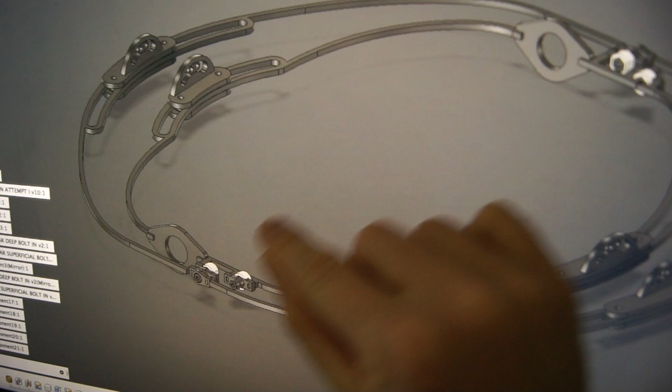And then it'll be kind of stacked up, and what'll happen is these are all spinning around one point. There's a point in here where your spine would be. So it's spinning, the sagittal joint is spinning through that, and then it comes around. And then sliding on this is the transverse joint, which is also going around that same point. And then these are the frontal joints, and those go around the same point as well. So they're all on this plane, and it's all on one point right here in the middle.

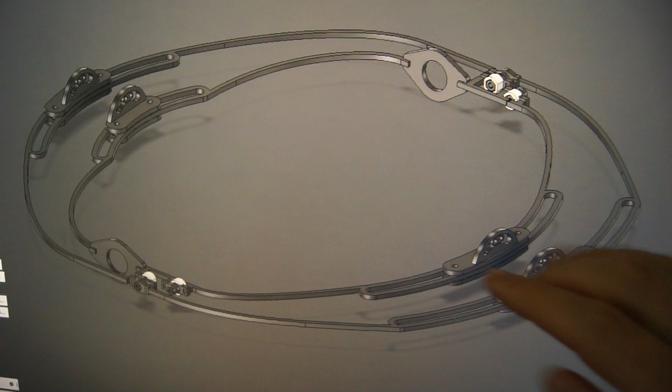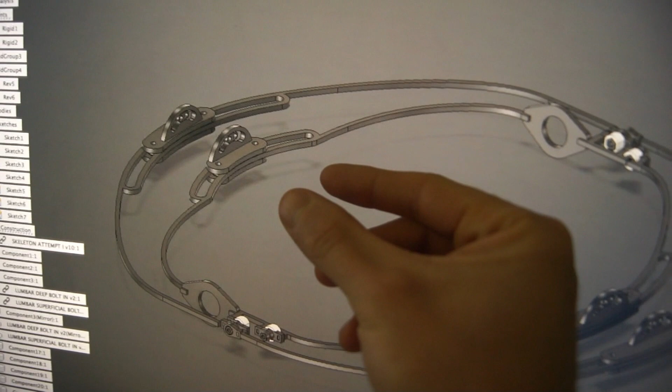And then what's going to happen is there's going to be some angled struts that go on and attach onto these parts, and come up and over like this. So they'll angle around my body and come in and attach here, and then off the sides there'll be another part that angles up, and then another one of the parts that goes outside of this, and then another one, so there'll be a part that goes here. That's the next thing I need to build, is the part that goes here, very similar to this piece right here.

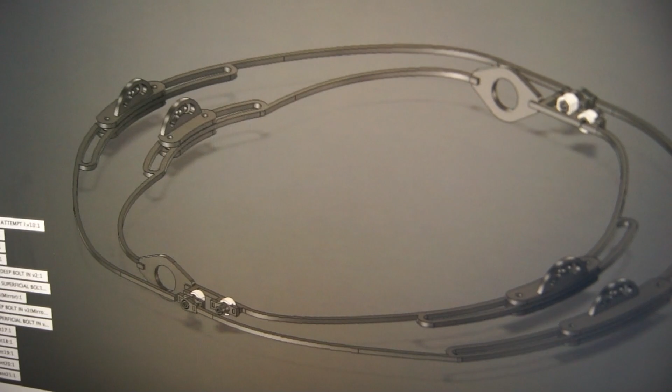So essentially there'll be another one of these things to hold this. There'll be struts that come up and around and wrap around, and then they'll be holding another one of those, and then another one of this entire unit will slide into there. So that way they're all in one piece, and you just have these curved pieces running in between them. And on those curved struts is where I'm going to build the skin off of as well. That's the plan right now.

I think this will work. Alright, I've got the framing done on the lumbar. I'm pretty happy with it. I'm going to change some stuff on draft 3 for sure. Let me show you what I got.

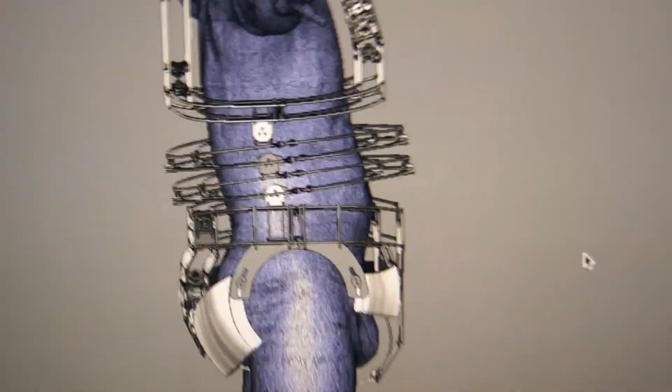Alright guys, here we are, done with the framing. So this is kind of what it looks like right now. Still a little bit tight in here. There's about 5 degrees of motion here, and then about 5 back. So overall you're getting 10 degrees of motion on that middle joint, around this joint right here.

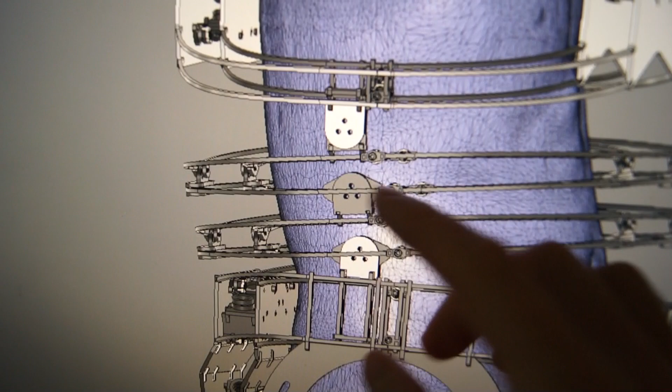Pretty decent. One thing I'm going to change in the future is I have these both, like this is one going this way, and then these parts are a single piece, right? So there's like a U-shaped piece that's cupping that way, and then a single piece going through there, and I have a cup going this way and a cup going this way. What I'm going to do on the next one is have them all going straight up, because that makes a lot more sense. It standardizes it. So instead of this being a double one, it would just be a single one coming off into the torso. That's one thing I'm going to do.

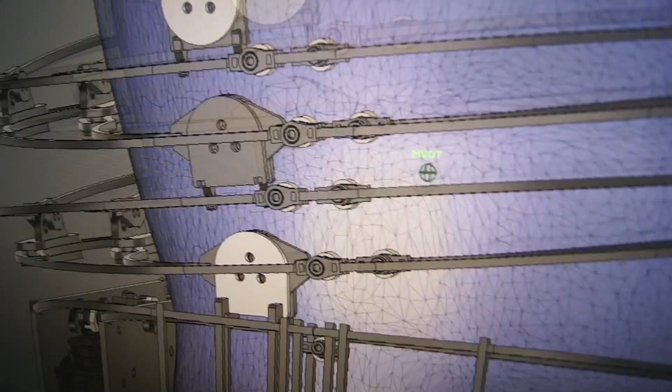The other thing I'm going to do is, if you notice right here, there's these bars coming across here, and they end up with the way the bolt-on system goes. There's enough space in here that I think I'm not really saving any space, because the idea is, because this is so tight, if we look right over here, there's not a lot of, the idea is you want to be able to put your hand down, your arm down on the side of your body, right?

So what we're going to do is I'm trying to keep all of this as small as possible so that you can lay your arm down on the side of your body. You feel me? So what I was trying to do is make it just one joint here and kind of have both of the deep and superficial come into one. But I don't think that is going to end up making any difference. So I think what I'm probably going to do, and that's again because of the way this bolt-on system works.

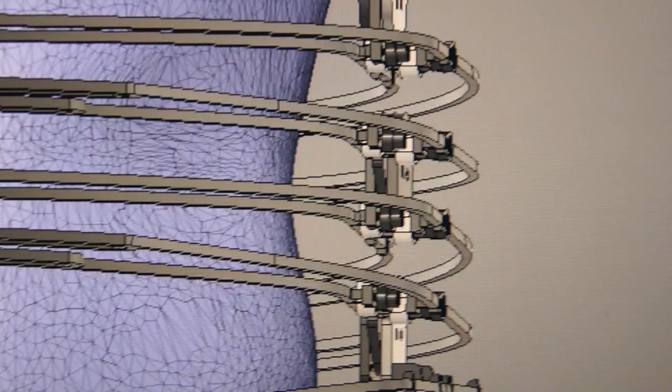I think what I'm going to do on draft 3 is instead of just doing one of these, I'm going to go ahead and do 2, which in a way actually simplifies it. Even though it's more complicated in the fact that there's more joints, it actually makes it easier than trying to make it this complicated thing where this comes around and there's no joint. It's just kind of like duplicating it instead of trying to figure out 2 different systems. So in a way, it actually makes things easier. Other than that, I'm pretty happy with it. There's a lot of space in here and a lot of space in here, so I don't know.

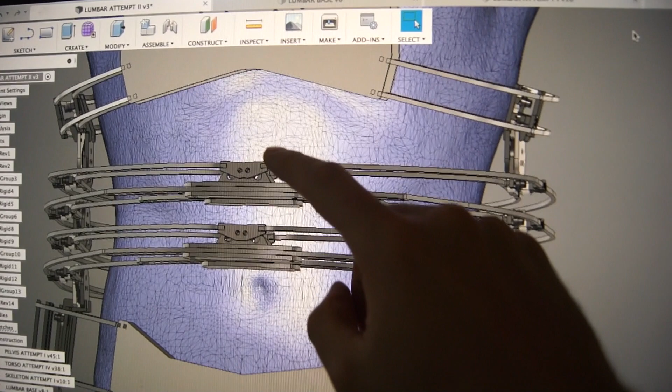What I might do is some kind of part that compresses, like a part that comes out from down here and comes down and then slides up in here or something like that. And the skin to kind of keep it, like a part that comes up and then slides back down or something like that to protect that part. I'm not entirely sure.

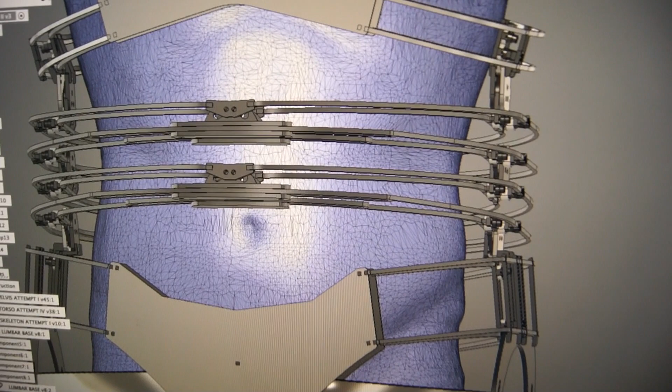And then the other thing I need to figure out is if I'm going to put some kind of foam around it. These ended up being the same 2 pieces, and these ended up being the same 2 pieces too. So that makes it easier to just go ahead and use the same thing twice. It does, however, not add much taper in here, so it's maybe not quite as pretty looking, but it doesn't look bad, I don't think.

I actually think it looks kind of cool attached together. It actually looks pretty good, doesn't it? Comment below and tell me if you think it looks badass as fuck.

Alright guys, that's it for today. I think this is the 4th day I've been working on the lumbar. I'm not sure if I'm going to do foam on it, so I don't know if we'll call it completely done. We're definitely done with the framing, the skeleton part of the thing. I'm not sure if I'm going to say I'm done completely with the lumbar yet.

I just need to think about it. That's what I'm going to do the rest of the day, kind of chew on it and go over it in my head. If I am done, the foam won't take that long if I decide to add it. I'll need to adjust a couple things, but that shouldn't be too bad. I can probably just do it right in the base because I made that as its own file, then brought it into the file you saw, so I can adjust that up front. It'll change both of them, which is nice.

So I can probably add parts if I need a place to bolt in foam support to where it actually would touch, I need to put bolt holes on for that. So that should be pretty easy to do if that's what I decide to do.

The other thing I'm going to add, so it's not completely done, there's one little thing I want to add, which is a part in the middle that holds the 2 pieces together, because right now the only thing holding it together is where it bolts on. There's nothing else holding it together, so essentially what I want is just like a little lock and key that goes together to keep it from translating around.